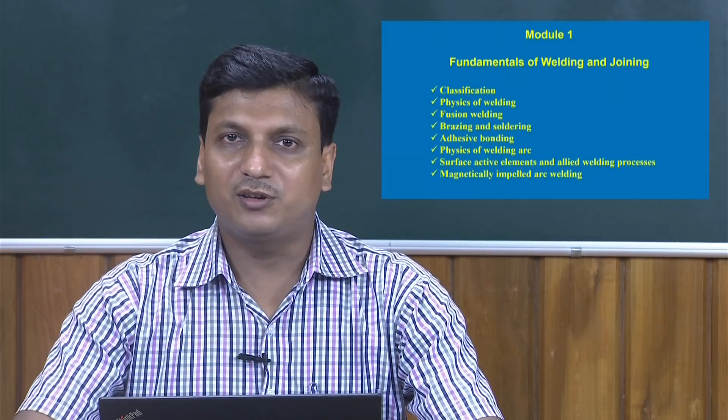Then more advanced topics in this section: what is the influence of surface active elements, and based on that, what different welding processes have been developed, or existing welding processes, and in what way we can modify these welding processes by considering the effect of surface active elements.

And finally, we will try to cover the magnetically impelled arc welding process. So these are the sections of this module, and the name of this module has been given such that it is Fundamentals of Welding and Joining.

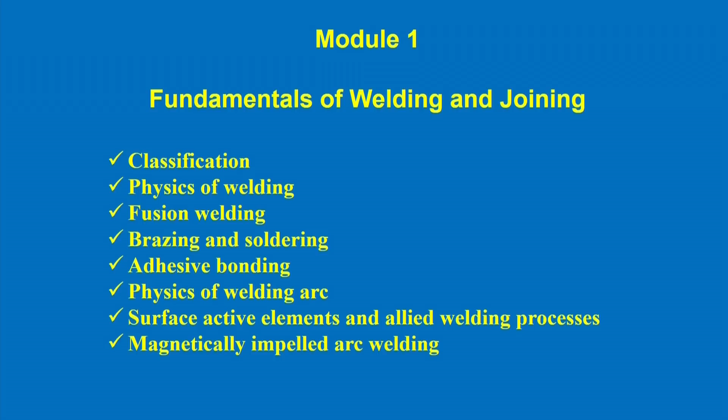We will try to get some basic idea about the physics involved in welding processes, or most conventional welding processes, the different technology of welding processes. We will just get some broad idea about the processes.

If we see, almost all sectors of industry have a need for joining of materials, that can be done either by fusing of the metals, or using some adhesives, or some other joining techniques. Let us see some listed applications areas.

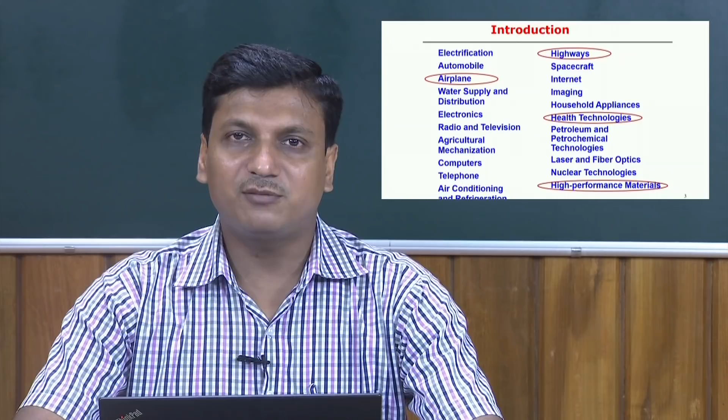Electrification, automobile, airplane, water supply and distribution, electronics, radio and television, agricultural sector, computer, telephone, air conditioning, and of course almost all sectors are covering this. So it is indeed very important to know about the fundamentals of different welding processes.

Now if you see, this technology is mostly used in the airplane or aerospace industry, highway and health technologies, spacecraft, and recently different welding processes have been developed looking into the application of high performance materials. So it covers almost all sectors.

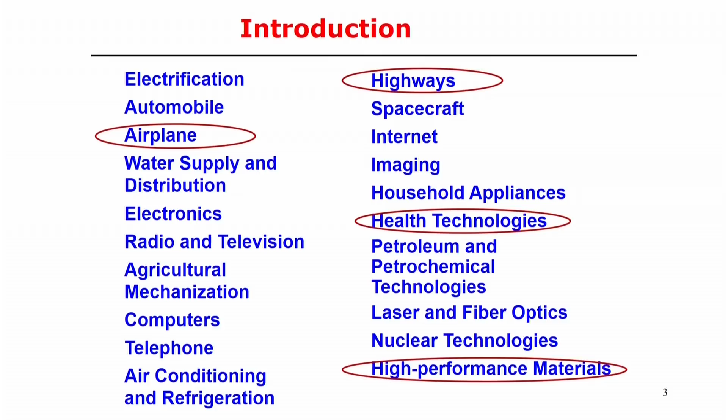So here is the importance of welding processes. Before going into much detail about all the welding processes, we will try to get some basic mechanism of all these processes. Probably it can be a review of different welding processes, their mechanisms only will be focused in this part.

Now how can we define welding and joining? There is no precise definition of welding processes or joining processes, rather we can say that when two metals, specifically metallic materials, are joined by fusing with the application of different types of heat source, that in general is called the welding process.

Normally welding involves fusion, and joining processes may be in another way - for example, when you use some fasteners, mechanical riveting, to join two components, that is also termed as a joining process, but there is no need of any kind of fusion, or atom to atom coalescence is not required in that case. So that can be considered a joining process.

For example, even in adhesive bonding, if you use some glue to join two materials, that can also be called a joining process, but here the mechanism is different from the fusion processes. So fusion happens in welding and joining processes, specifically termed the fusion welding process.

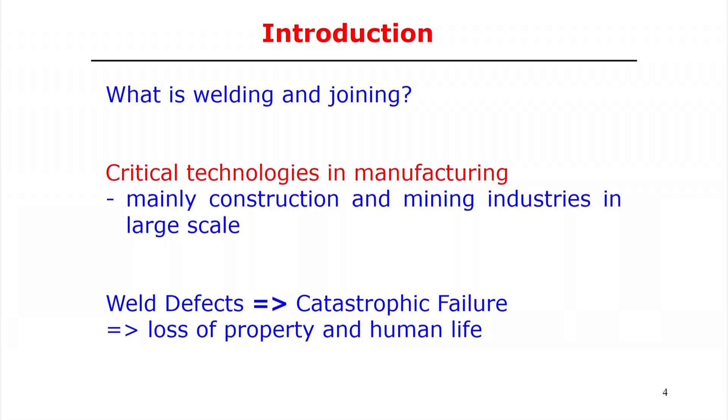Of course, we can also consider solid state welding processes. We generally say solid state welding process, sometimes also solid state joining processes. Even soldering and brazing are an application of a third metal used to join two different materials by fusing the third metal, but without necessarily melting the parent metal. That is the basic mechanism of soldering and brazing, which we can also say is a typical joining mechanism.

So in general, we can say it is not only welding or only joining process, but welding and joining processes of materials, irrespective of metals or non-metals.

Now, critical technologies in manufacturing - the huge or maximum application of welding and joining technologies is observed in the construction industry and the mining industry. In these cases, the joining or welding of materials involves a large amount or high thickness of the metal.

But at the same time, if we look at very precision applications of welding and joining technologies, we observe them in health technologies and biomedical devices, where the requirement is joining very small thickness, sometimes less than 100 micrometers. So the application of welding and joining ranges from very precision instruments at the level of 100 micrometers or less, to a large extent of bulk joining of material.

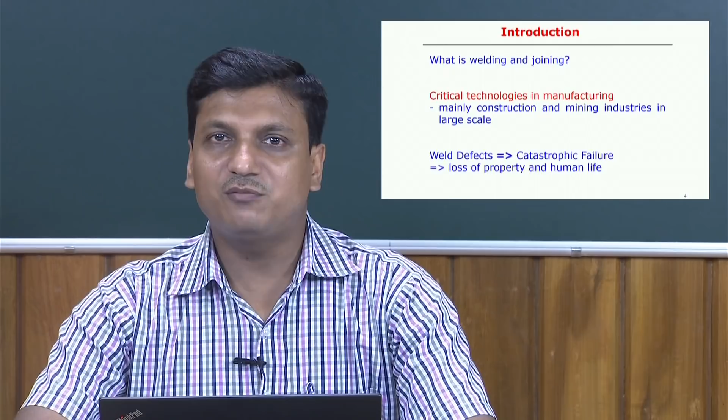So we always try to target reducing the nature of distortion and residual stress. That is another problem that comes by inheritance - the presence of any kind of residual stress and defects during welding processes. So it is also necessary to analyze and know the basic mechanism or basic engineering of different welding processes.

Now, before that, welding and joining processes can be classified in the following way, based on different types of welding. Of course, the classification can be done from different perspectives.

With respect to that one perspective, you can say there are three different types: fusion welding, pressure welding, and friction welding. Here basically the difference is the nature of the heat source and how we can control it, or how heat can be generated to join two different or similar kinds of materials.

In fusion welding, we apply the heat source in such a way that it crosses the melting point of the substrate material, so it can fuse together, and after solidification it makes the structure. Pressure welding is simply application of pressure or load as the main mechanism for joining materials. Friction welding generates heat due to friction, and normally the maximum temperature is kept below the melting point, so it can be considered a solid state welding process as well.

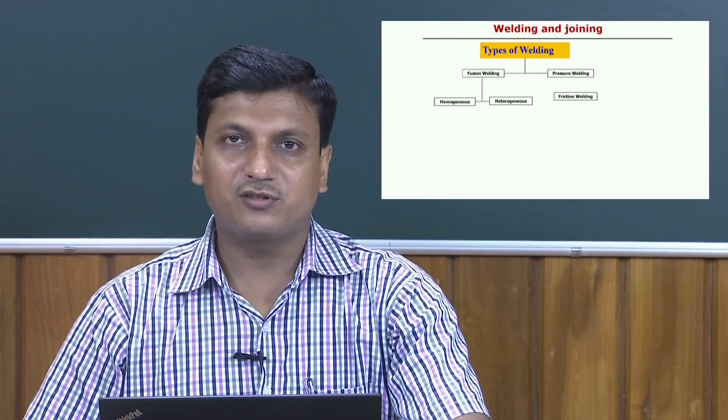These are the three types of welding processes. We can further see that fusion welding processes can be classified as homogeneous and heterogeneous welding processes. Heterogeneous welding processes include brazing and soldering, meaning we use another second or third material to join similar or two different types of material. In homogeneous welding processes, it may not be necessary to use a third material; two similar materials can join and form a homogeneous structure. Even for dissimilar materials, they can join together but finally form a homogeneous structure.

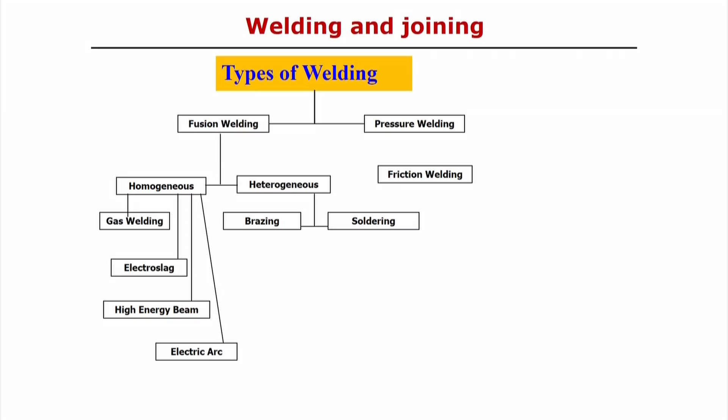So for homogeneous welding, there are several types: gas welding process, electroslag welding process, high energy beam, and electric arc. In all these cases the heat generation mechanisms are different, but the common thing is that when you try to join two materials, there must be some amount of heat generation so that the materials can be joined together.

But in all these cases the source of heat is different. First is gas welding, where burning the gas converts chemical energy into heat energy, which is utilized to weld the materials. Electroslag welding is similar, where an arc can be generated. High energy beam uses either laser or electron beam as a high source of energy, and electric arc welding is based on the electric arc.

So these are the different types of homogeneous welding processes, but the heterogeneous welding process mechanisms are different. In heterogeneous processing, we conventionally find two different types of welding: brazing and soldering. We will discuss all these processes in detail.

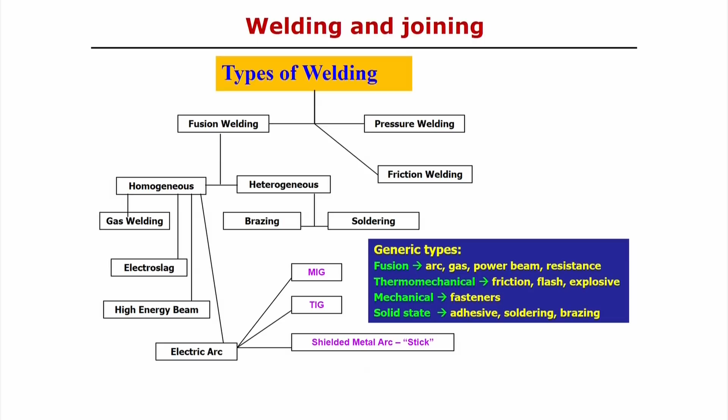Even for friction stir welding process, there is mechanical stirring action as well as frictional heat generation responsible for the welding of the material. So that can also be categorized as a solid state welding process. The point is that when you try to classify the different welding processes, we need to consider different perspectives. So these are the different types of welding process that normally exist.

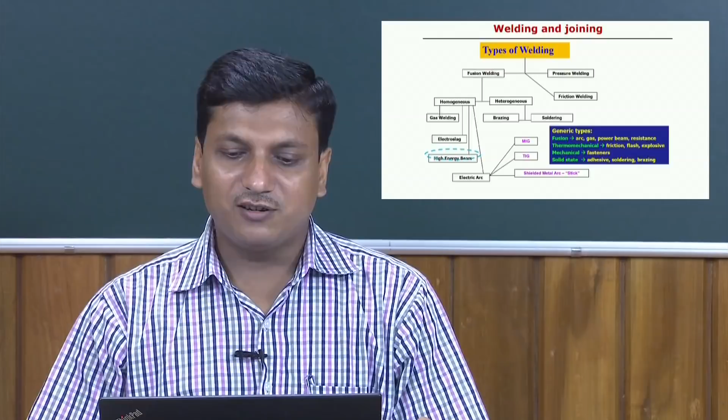If we see from another perspective, how can we classify the welding process? Before that, let us look into what different types of welds we generally observe. If you see the first figure, there are three types of welds. The first one is the common application for hard surfacing, basically surface welding, meaning the application of heat and making the joining of the materials happens only over the surface.

The second one is groove welding, making a groove between the two plates, and that groove can be filled using some filler material. The primary use of groove welds is to complete the butt joint, the configuration of the butt joint.

In this case, two plates are flat and they are joined at the edge, either using some filler material or not. So that can be one type of joint, in general called the butt joint, but it can also be considered a groove joint if we make some groove before welding the two metals.

Another type of weld is the fillet weld. Here the configuration of the geometry of the base metal is different. It makes a kind of T section, but only one side is wound or filled by the welding material. That is called the fillet weld, having a triangular cross section, used at a 90 degree angle.

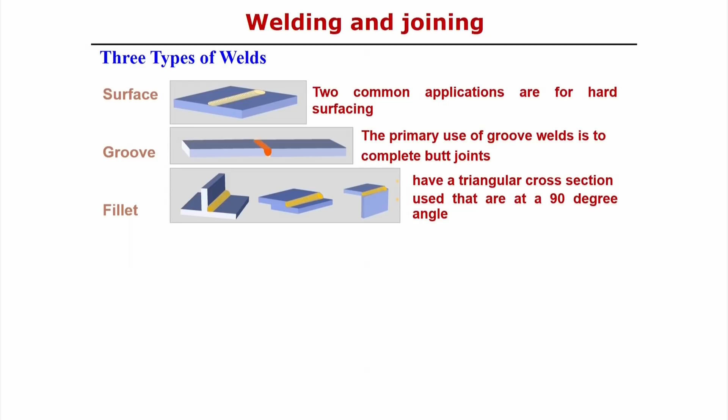Fillet weld can be done over a T cross section, and in a lap joint where two different metals are joined and welded using material, or in edge joints, or for two edges meeting perpendicularly, they can be joined using the fillet.

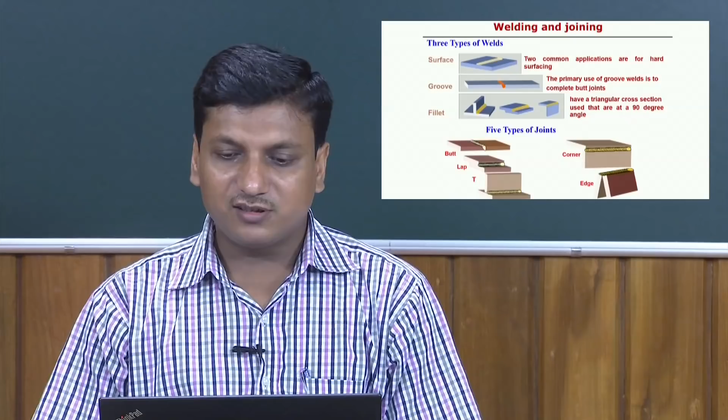So these are the different types of welds, but the type of joints can be classified another way. We can observe the butt joint, simply joining the two materials over the edge, and the lap joint, where one plate overlaps another plate, and any one of the contact surfaces can be joined using filler material, or without using filler material - that is called the lap joint.

Here the geometric configuration of the joint is different. In the T joint, one horizontal plate is there, and a vertical plate is kept at 90 degrees over it, and then either both sides can be joined or a single side can be joined. That is called the T type of joint.

Corner joint: the two plates are kept perpendicular with each other, and that corner is joined using the welding process. And edge joint: over the edge the geometric configuration is different, but the weld can be done over the edge. So from the figure it is obvious that there are different types of welds, and different types of joints we can observe practically.

Depending on the way we configure the different substrate materials, we can find out the different nature of the types of weld joints we observe in practice.

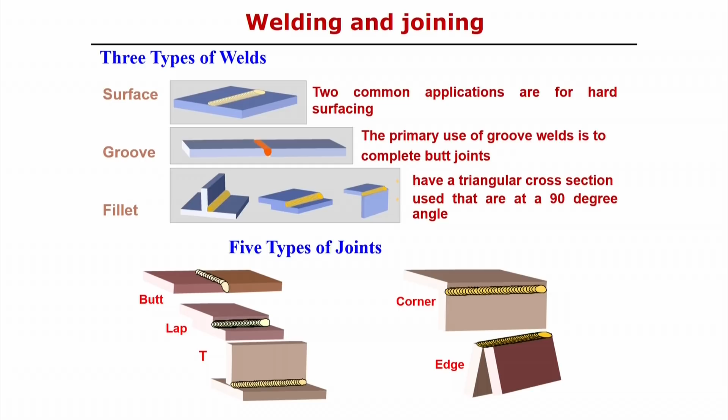Now we come back to the classification of the welding and joining processes. In general, we can say joining processes itself includes the welding processes. In the joining processes we can see there are three different types: one is the permanent joint, another is the non-permanent joint, and another is the semi-permanent joint. So in that way we can categorize the different joining processes.

First is the permanent joint - a welded joint can be considered a permanent joint because coalescence of the materials happens, either in the liquid state, meaning above the melting point temperature, or in the solid state. So both can be considered permanent joints.

Second is soldering. When soldering is done to join two components, the solder material needs to melt and can join the two materials, but it's not necessary to melt the parent metal. This also creates a permanent joint. Similar philosophy applies to brazing, which is also called a permanent joint.

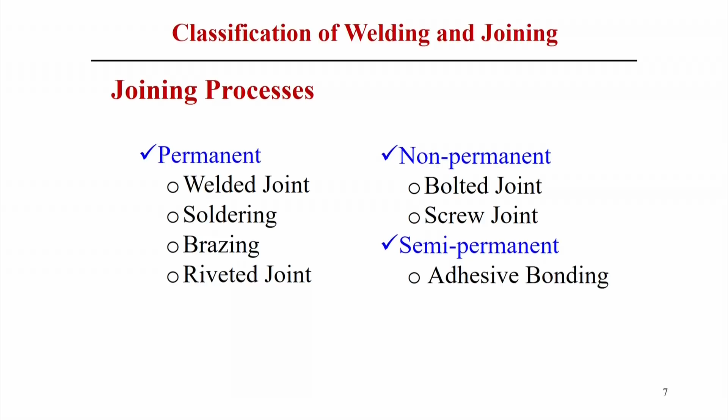And of course, the rivet joint - this can be considered a kind of mechanical joint, but also a permanent joint, unlike a bolted joint or screw joint, because it's possible whenever required to disassemble those joining materials. In that sense, bolted and screw joints are considered non-permanent, but the rivet joint is permanent because if you want to disassemble the components, you need to break the rivet part - that isn't necessary for bolted or screw joints.

Semi-permanent joints can be categorized as adhesive bonding. When joining two materials, we put adhesive between them, and after a certain curing time, the two components or metals can be joined. This adhesive bonding has a certain life - after some time they can be disassembled, depending on the type of adhesive used. So in general, adhesive bonding is considered a semi-permanent joint.

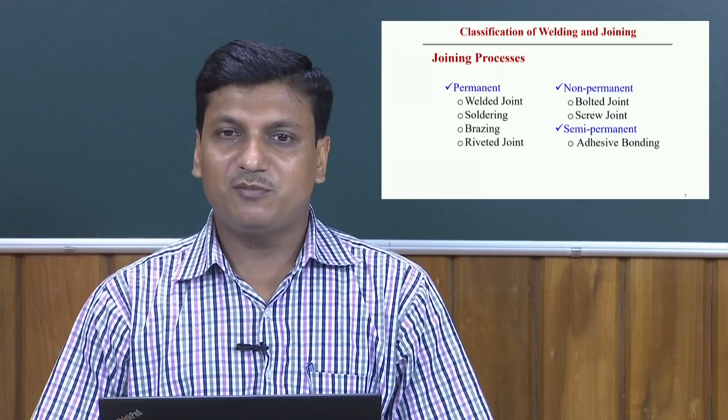So in that perspective, we have different permanent, non-permanent, or semi-permanent joints. This is one way of classifying different weld joining processes. Looking at it another way for welded joints - there are several joining processes: fusion welding, metal deposition process, and pressure welding. These three main categories can be used when classifying weld joints.

The different types of welding processes included in the fusion welding process are gas welding, arc welding, high beam energy welding, and thermit welding. In all these cases, we apply heat source intensity in such a way that it melts the base material, and after solidification the permanent joint is formed. So the nature of the heat source is applied in such a way that it fuses the base material - that's why it falls under the category of fusion welding.

In fusion welding, the source of energy comes from creating an arc, using chemicals, using gas, or using high beam energy like laser and electron beam. But in the case of metal deposition process, the classification is different. Here, we use a source of energy to fuse the solder material, but it does not fuse the base material. So in metal deposition, we use an extra material to join the two metals without reaching the melting point of those two materials - soldering, brazing, and adhesive bonding all fall under this category.

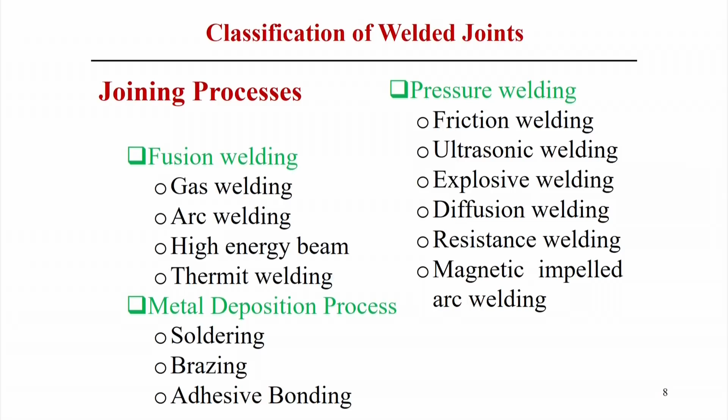Pressure welding is another categorization - the different welding processes included here are friction welding, ultrasonic welding, explosive welding, diffusion welding, resistance welding, and magnetic impelled arc welding. In this case, normally pressure welding means application of load is required, which helps create the joint or bonding between the two components or materials. In friction welding, apart from pressure, frictional heat is also generated, which helps the coalescence of the materials.

Similarly, ultrasonic energy can be used for joining. In explosive welding, an explosive is used to highly deform the components - a high rate of plastic deformation happens within the component, and then the two components can join in a solid state, creating a solid state welding process.

Similarly, resistance welding also applies that resistive heat, but at the same time, to make the joining process we need to apply some mechanical load as well. So in that sense, resistance welding due to the ohmic heating generates the heat, but at the same time we need to apply some constant or maybe variable pressure also, so that the welding can be done.

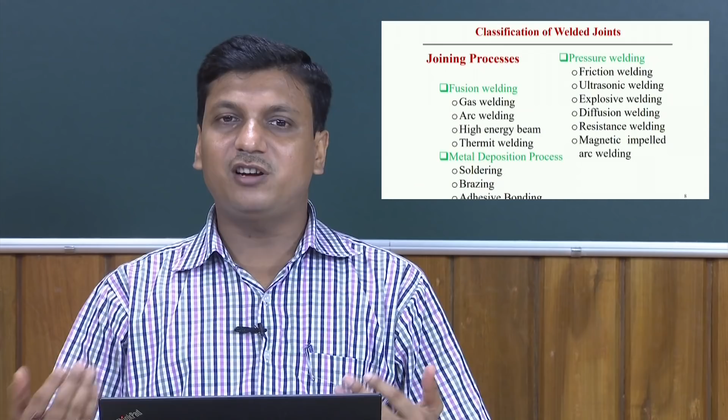So apart from the various sources or generation of heat, there is also some mechanical loading condition required in case of pressure welding. Anyway, we will try to discuss all the different types of welding processes individually.

By looking into that different way of classification of the welding processes, now we will try to focus on the physics of the welding process. So how the joining of two materials comes about, and what way the different developments in the welding industry have been done over time.

So the first question is, is it possible to bring two metallic surfaces together and join these two surfaces or two components? If that is possible, then I think there may not be necessary all this development in the welding processes, but let us look into that.

Since only the grain boundary separates them, that means between the two metals, if the metallic surfaces come in contact, then joining adherence with large force is possible. But this is the very ideal case, because that type of metallic surface may not be possible practically, because most metallic surfaces are contaminated with oxide layers.

So ideally it is possible to bring two metallic surfaces together if they are not contaminated with any kind of layer. In that sense, in the absence of that layer, if the two metallic surfaces come into contact, then it is possible to join these two metals.

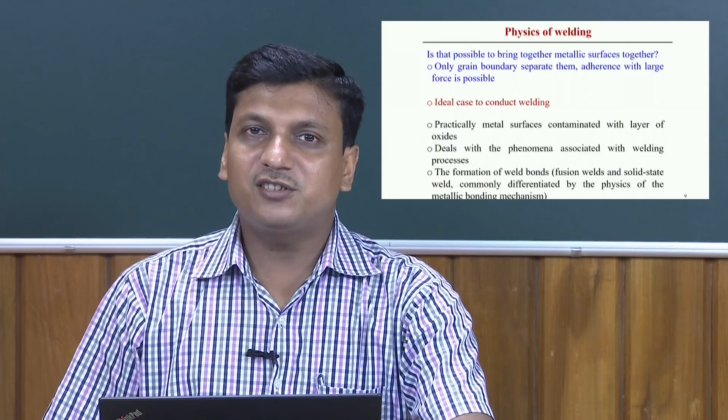So we will try to look into that deviation from the ideal cases and what development of the welding processes can be done. Now before that, we will look into the physics principle of the fusion welding processes.

So in fusion welding processes, basically they are created by the coalescence of the molten base metals mixed with the molten filler metals, but not necessarily are filler metals always required. In this case, fusion welding happens by heating the metals to raise them to the melting point temperature for a fusion weld to be produced.

So in this case what happens is the metal is raised to molten temperature and they mix up, the molten metal mixes up, and then finally they solidify to the ambient temperature and make the bonding between the two materials. That bonding may happen either between similar types of materials or maybe two different types of materials, but in this case the fusion welding process is typically characterized by the molten pool zone, basically the molten zone, and then the heat affected zone.

So the heat affected zone occurs because heat is applied to melt the surface, but up to a certain extent there may occur phase transition or phase transformation, and that is inherent to the process. So that phase transformation effect is basically indicated by the heat affected zone, and that heat affected zone is identified microscopically or macroscopically as well.

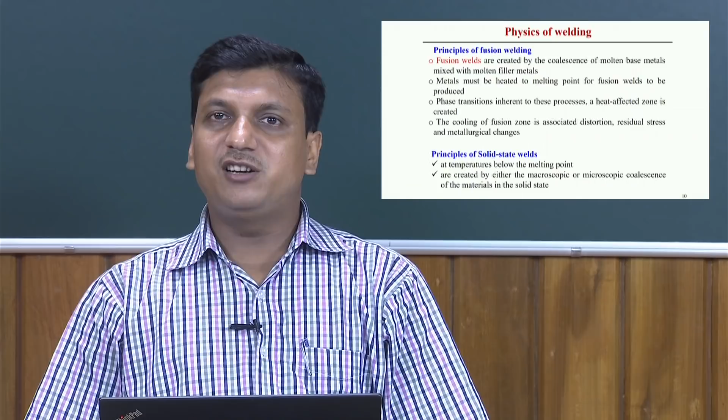Now, what is the solid state welding process? In solid state welding, the temperature should be below the melting point temperature, and the weld is created by either macroscopic or microscopic coalescence of the materials, which remains in the solid state. Phase transformation may also happen, but it happens below the melting point temperature of the materials. So apart from this, we've discussed the principle of fusion welding and the principle of solid state welding process.

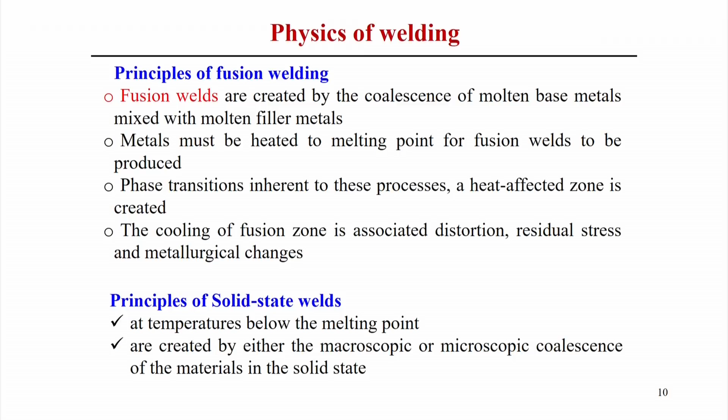Now we come to the physics of the arc welding process. Arc welding is the most commonly used process, and in arc welding we generally control several parameters. First is the voltage - electrical potential or pressure that causes the current to flow. Voltage is the potential required to flow the current, and current can be defined as the movement of charged particles in a specified direction.

Voltage decides the flow of current, and current is basically the charged particles flowing in one direction. When there is current flowing in a specified direction, it creates an arc between the positive and negative charged workpiece and electrode material, and tries to complete the electrical circuit. This electrical circuit makes the development of the arc welding process, but the nature of voltage and current here is basically different from the common electricity we use normally, specifically in a bulb.

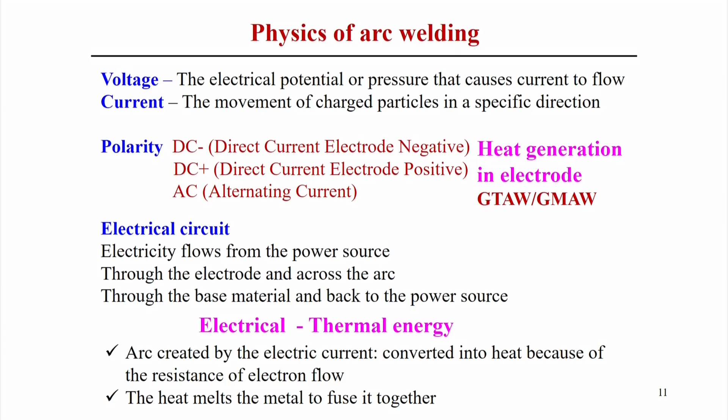So the electrical circuit basically decides the nature and amount of heat generation. We can see the electricity flow from the power source through the electrode. If we consider the circuit this way: electricity flows from the power source, through the electrode, then passes across the arc, flows through the base material, and again back to the power source. In that way it creates the electrical circuit.

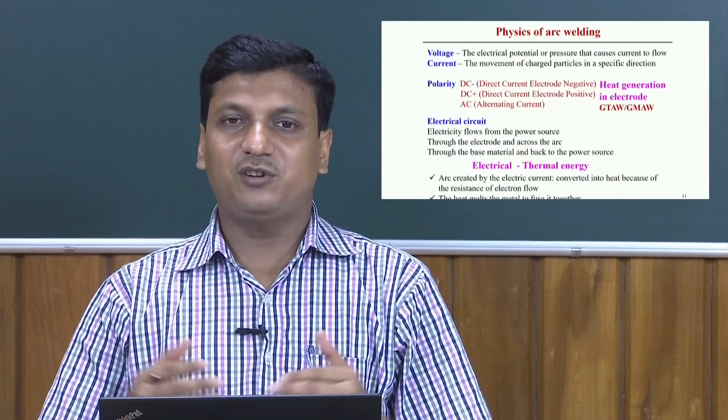So formally we can say electrical energy is basically converted to thermal energy in the arc welding process. The arc is created by electric current, which converts to heat because of the resistance of the electron flow. This resistance is responsible for the creation of heat, and the heat melts the metal to fuse it together. That is the physics of the arc welding process.

Next, we will cover the basic concept generally used in arc welding processes: enthalpy of melting, basically the energy required to melt the material, and what factors are responsible for estimating the enthalpy of melting. So straightforward, we can find out the amount of heat energy required to melt a given volume of the weld.

We estimate it by separating it into two parts: the heat required to melt the solid, and then the latent heat of fusion, which is required to change the phase from solid to liquid. So we can estimate Q, where the first component is based on the specific heat capacity, to raise the temperature from ambient temperature to the melting point temperature while remaining in the solid phase, that is the amount of heat required. The second part is the latent heat required to change the phase.

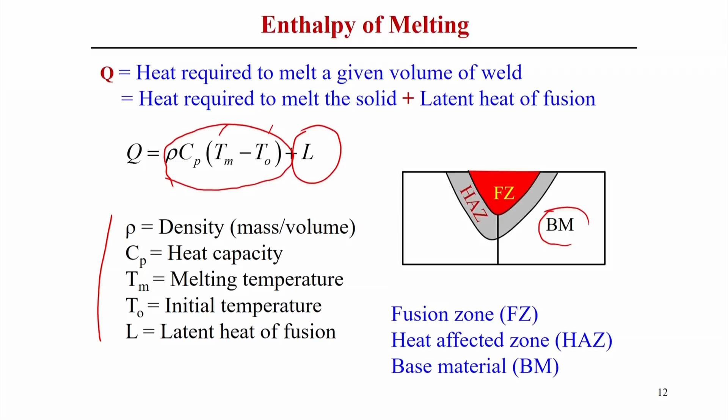Now, what are the different energy sources generally used in welding processes? The energy is used to produce the bond in the form of heat, first making the heat, application of the heat to melt the metals, and then cooling of the metals through solidification process. So here we will try to categorize the heat sources used for fusion welding processes. First is the electrical sources.

We use electrical energy available either in the form of AC alternating current or direct current sources. For example, in different welding processes like arc welding, resistance welding, electro slag welding - all these different welding processes use different electrical sources to create thermal energy.

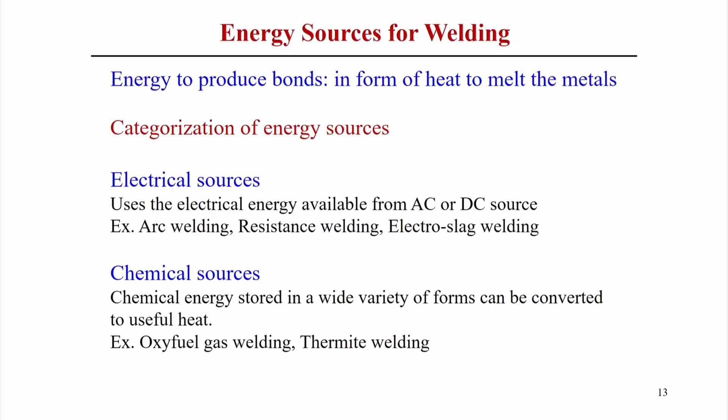Second is another source of energy for welding - the chemical sources. Here the chemical energy is stored within a cylinder, and we can use the chemical energy in different forms. For example, oxy-fuel gas welding, where we use a fuel cylinder to make the gas welding process.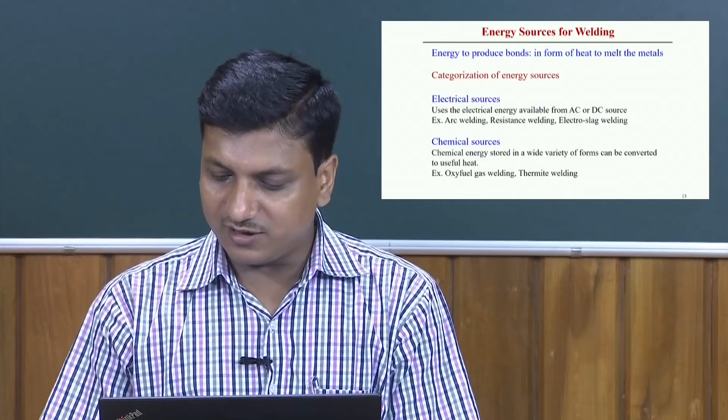Even for thermite welding processes, we use chemical energy. In this case we use thermite as a mixture of oxides and other materials, which creates a chemical reaction - an exothermic reaction - that creates some amount of heat, which can be utilized for welding purposes. So in these cases, the chemical sources act to produce the generated heat.

Optical sources can be categorized as a focused beam of electrons or laser, which is operated according to the law of optics. In this case, it can achieve a high power density - a high concentrated heat is possible as compared to other welding processes. Typical examples are laser beam welding and electron beam welding processes. In these two cases, we use the heat source from optical sources.

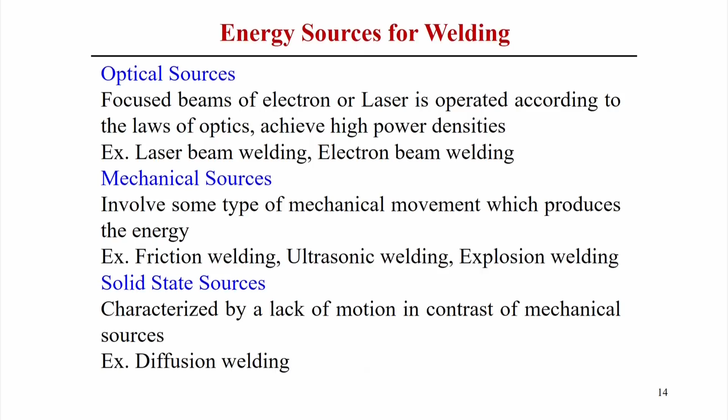Then mechanical sources involve some amount of mechanical movement that produces the amount of energy. For example, friction welding - if you give mechanical motion to the substrate material at high rotational speed, and it comes in contact with another material, there may be generation of heat due to friction at the contact surface, caused by the mechanical motion of the substrate material.

So that is friction welding, ultrasonic welding and explosion welding. In all these kinds of welding processes, the mechanical source actually produces the amount of heat.

Solid state sources can be categorized separately. In this case, it is characterized by a lack of motion, in contrast to the mechanical source - we are not using any mechanical motion as a source of generated heat, but rather, with the application of a concentrated or distributed load, which is responsible for the joining of the material.

So that is one example, diffusion welding, and in this case maybe the source of the energy can be considered as a solid state source.

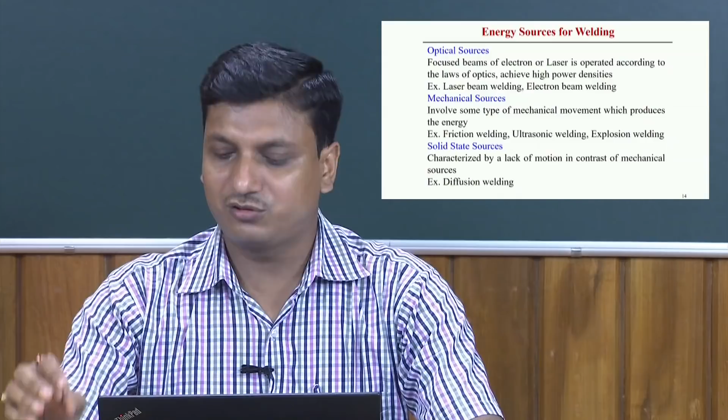Now, when analyzing the different energy sources required for the welding process, we will look back to the different physical properties of the material which may be significant or specific to the welding processes. Physical properties of the materials influence the applicability of the various joining processes, so we need to know the different physical properties of the materials, as that decides the applicability of the different welding processes.

First is electrical resistivity. It has the maximum effect in resistance welding and a significant role in other processes like gas metal arc welding or gas tungsten arc welding. So we should know the electrical resistivity of the material to decide the applicability of the different welding processes in principle.

Thermal conductivity: the way materials can transport heat depends on thermal conductivity. For example, copper has very high thermal conductivity, so sometimes it is very difficult to weld, because on application of heat it immediately conducts away the generated heat, so concentration of heat is less, making it harder to melt the material. So it is necessary to know the thermal conductivity; it is a very significant parameter that decides the applicability of different welding processes.

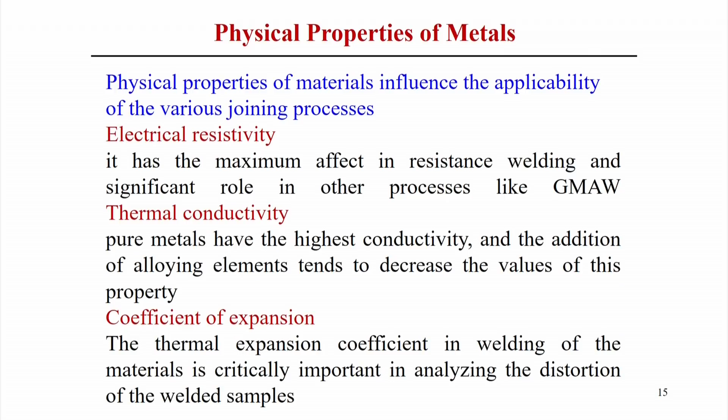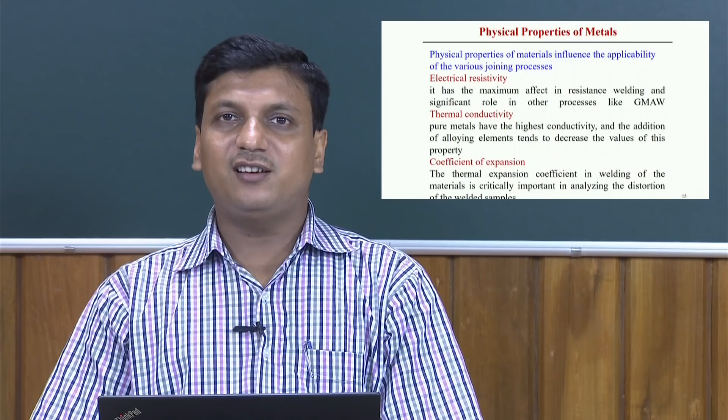Next is the coefficient of expansion. The thermal expansion coefficient in welding of materials is equally important to analyze distortion of the welded specimen, because application of thermal energy produces thermal strain, and the amount of strain depends on the expansion coefficient. If two different materials have a huge difference in thermal expansion coefficients, there is difficulty joining them, but if two dissimilar materials have a similar range of expansion coefficient, the joining will be a little easier. So thermal expansion coefficient is another important parameter directly linked to the distortion analysis of a welded joint.

Specific heat: we understand the measure or amount of heat content, or the amount it can absorb or store as heat. That amount is basically decided by the specific heat of a specific material.

Ionization potential: for different materials, the ease of arc initiation relates to how easily we can create the arc in arc welding processes, and how easily it can be maintained or stabilized. This relates to the ionization potential of a specific material. To get easy arc initiation and minimum stability requirements, the ionization potential of the material is required in this sense.

Metal oxides: oxidation rate is another critical problem in the welding process. Different materials have different oxidation rates, and the refractory stability of the metal oxides during welding affects the transfer of alloying elements across the arc; it also depends on the different alloying elements of the parent metal. So it is very important to know the oxidation rate of a specific material, or the nature of the metal oxides, and when selecting a welding process for a specific material, it is necessary to analyze the formation of the metallic oxide.

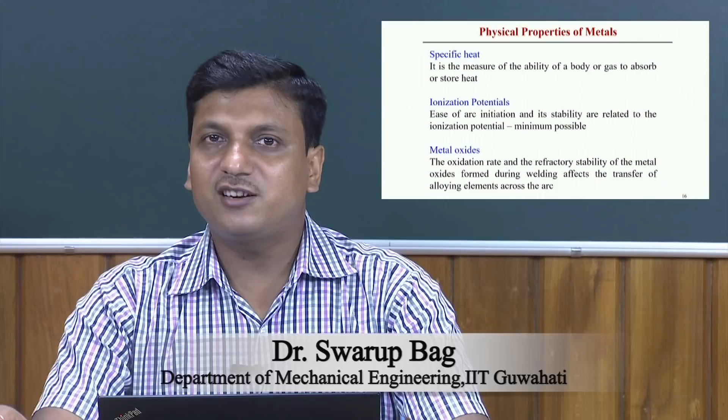For example, aluminum has a high rate of oxidation and easily forms aluminum oxide. So when choosing the welding process, we generally use alternating current, AC, such that it removes the oxide layer in half of the cycle, and for the remaining cycle time it simply heats the material. In that sense, analysis of metallic oxides is required.